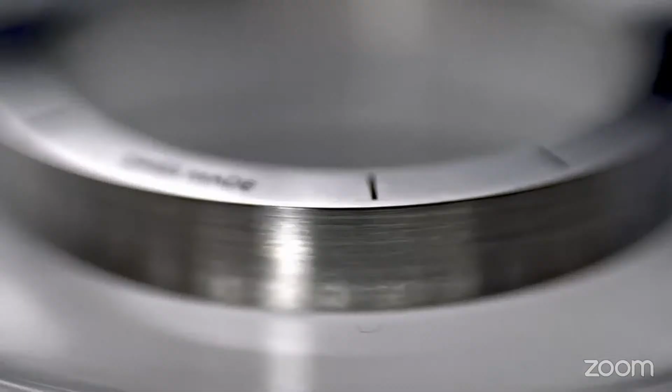Diverse sectors like automotive, jewelry, watchmaking, biotechnology, semiconductors, textiles, and consumer electronics all have one thing in common: the challenging demands of precision manufacturing are tightly coupled with the need for rigorous efficiency and scalability.

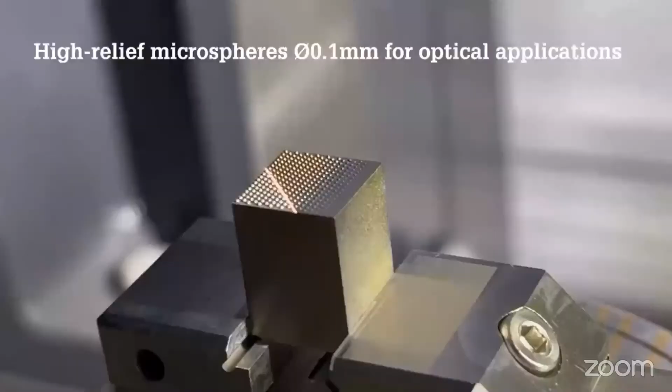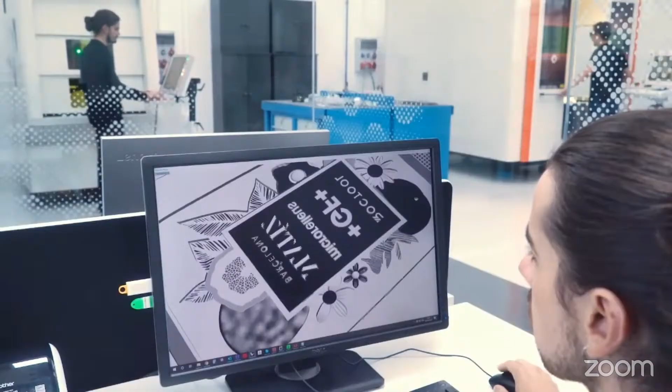But getting things right first time presents formidable obstacles. Take automotive, where laser micromachining is key in making precise components. There is huge pressure from clients to optimize production speed without compromising quality, because product recall is the nightmare scenario for car manufacturers.

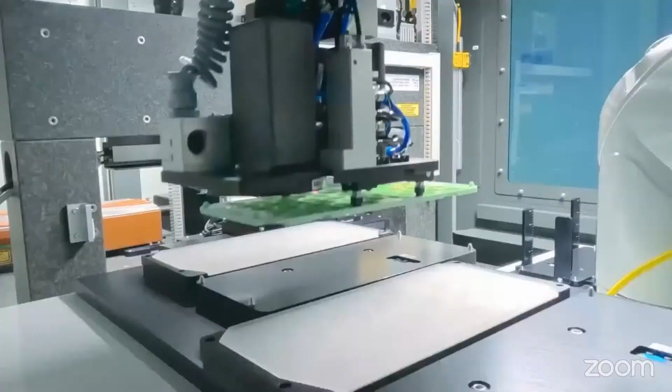Similarly, in the jewelry and watchmaking sectors, precision is synonymous with value. End users deal with the delicate balance between achieving complicated designs yet maintaining cost effectiveness.

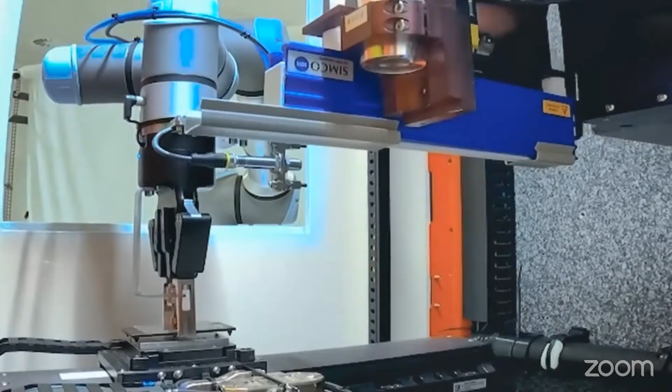And in biotechnology and semiconductor manufacturing, the quest for ever smaller components demands cutting-edge laser technologies capable of sub-micron precision, pushing the boundaries of current capabilities.

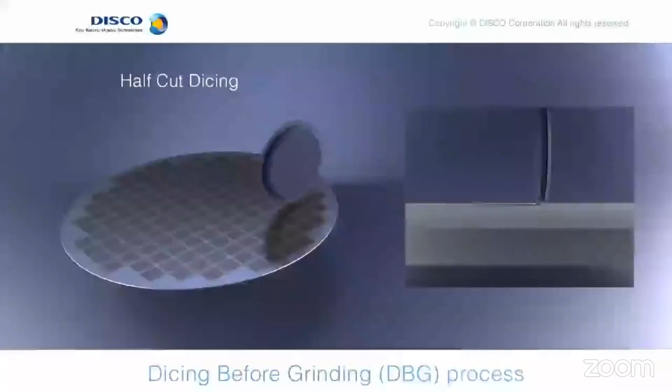In the consumer electronics sectors, where smaller and lighter is usually better, partnerships with suppliers offering precise beam shaping capabilities can accelerate sustainable product development.

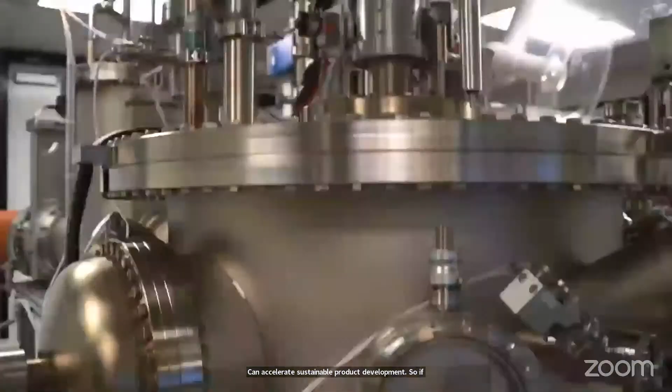So if you are a manufacturer of ultra-fast lasers, laser diodes, specialty fibers, laser optics, if you want manufacturing equipment for assembly and test of laser systems, or if you are looking for the right laser for the right application, then do not miss the chance of making meaningful connections.

Prepare your answer to the Optica question and then join us at 7 AM in Seattle, 10 AM in New York, and note the slightly earlier starting time of 3 PM.

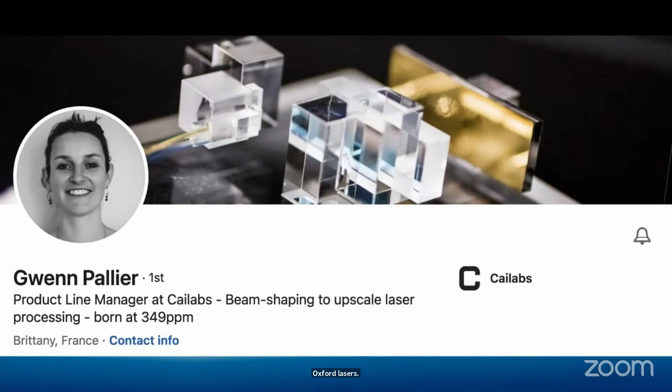Vilnius, Lithuania, Light Conversion. Since to stay ahead, you need to collaborate, the Optica question has never been more relevant. So let's start hearing answers now. Indeed, right now, let's start hearing answers.

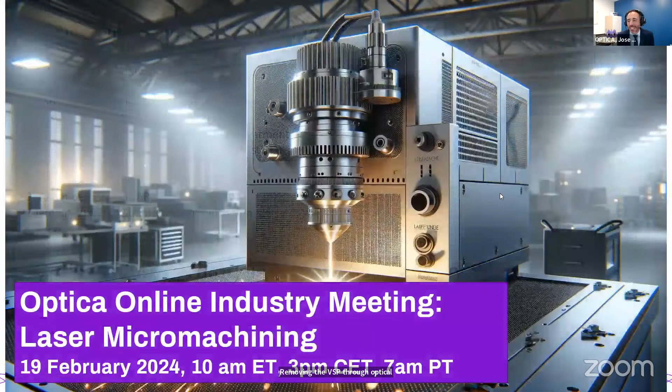As I said in the intro video, we have companies who are the integrators. They come here offering something to the rest of our members: Disco, Lasea, Coherent, Akoneer, Luxinar, and Turner Laser Systems. And the companies who come here with an enabling solution: Oxford Lasers, Amada Weld Tech, Cailabs, Direct Machining Control, 3D Micromac, Amplitude, Asphericon, and Light Conversion. And our job today is to connect them, to connect companies.

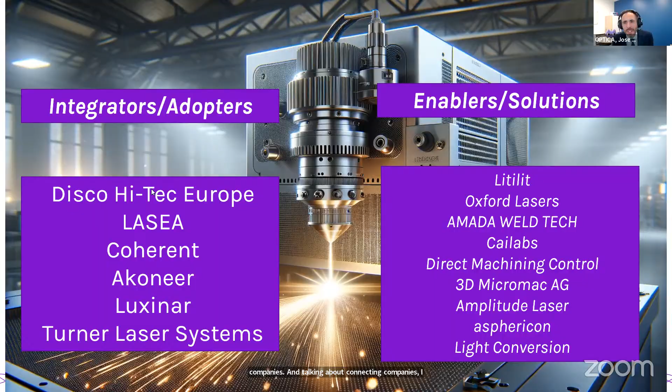We're providing them with contacts with different companies who provide coatings, different materials, optical design, software, but also with potential customers in the field of laser diodes, photonic integration, data and transceivers, cameras, tomography, everything that the companies in optics manufacturing have to do. This is the Global Advanced Manufacturing Alliance. All the companies in optics manufacturing are going to find ways to connect with potential suppliers and with potential customers.

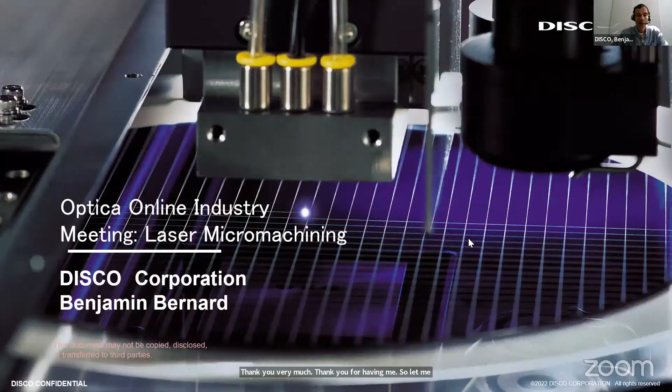Thank you very much, Jose. Thank you for having me. So let me share my slides. Can you see them? Crystal clear. Perfect. Then konnichiwa and arigato gozaimasu for having me here.

My name is Benjamin Bernard, and I'm working for the Disco Corporation. So who is Disco? We are a Japanese company. Our headquarters and R&D center is located in Tokyo, and all our production is in Japan. We have three main plants, the Kuwabata, Kure, and Chino plants. But you cannot only find us in Japan; you can find us more or less everywhere our customers are located. We have a pretty broad worldwide footprint, as you can see in Asia: Korea, Taiwan, Philippines, Singapore, and China.

In Europe, where I'm located, the head office is in Munich, and of course in the US on the West Coast as well as on the East Coast. Overall, we have roughly 6,000 employees, and we have already successfully sold quite a few units to customers. So what are our key technologies? We call them KKM. KKM stands for Kiru, Kezuru, Migaku, which means dicing, grinding, and polishing.

In the wafer manufacturing process we address mainly the back-end processes. So the grinding of the wafer until you reach the final thickness, and then some polishing to have the desired surface condition, followed by wafer singulation and also package singulation. We have grinder, polisher, and blade dicer in our portfolio, but I want to concentrate on our laser applications.

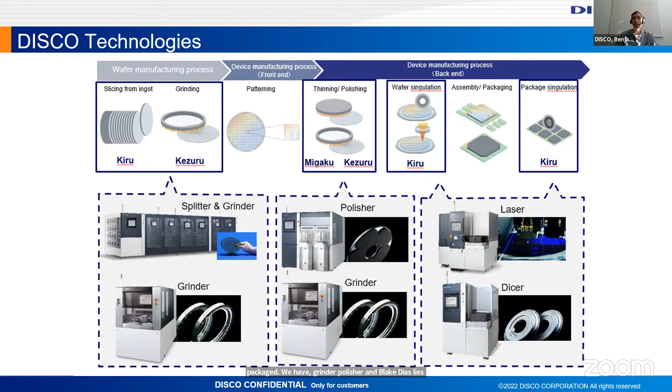For the laser applications, we have quite many different approaches. On the left side, you can see the ablative laser approaches, mainly laser grooving and laser full cut. I will have a slide on it later. In the center, you see the non-ablative approaches. Here we highlight stealth dicing, where we teamed up with Hamamatsu-san. The idea here is to focus inside the material, do a modification, do many of these modifications along your separation line, and then later on by applying an external stress, you can separate the wafer.

We also have KABRA, which addresses the wide bandgap wafer production. I will have a dedicated slide on that at the end, so I will come back to that later. Last but not least on that slide, we have the laser lift-off, mainly gallium nitride grown on a sapphire substrate, and then you want to lift off the GaN. So we use a laser to focus precisely on the interface between those two materials, and then you can lift off the gallium nitride layer from your bulk material and transport it wherever you want to have it.

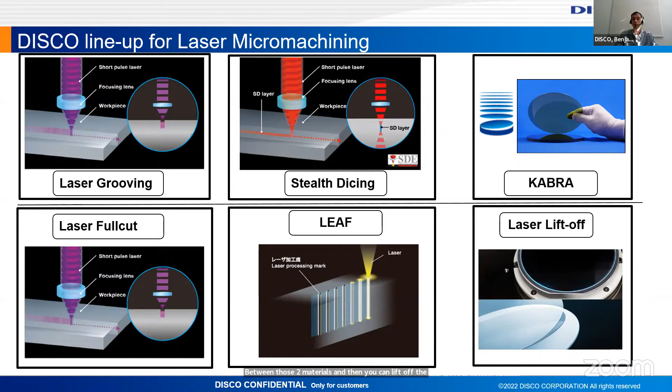So focusing on the laser ablation, what kind of process strategies are we offering? The main application in the semiconductor industry for the laser is still laser grooving, followed by blade dicing. The laser is used to remove some sensitive top layers or PCM structures like metal structures, gallium nitride that is hard to dice with the blade. You open the dicing street for the blade cut, and then cut the bulk material by the classical blade dicing approach.

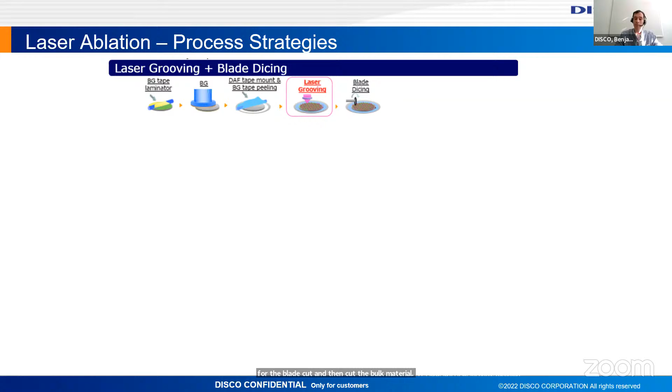Very similar, but a little bit changed in the sequence, is the dicing before grinding approach. Here you do the laser grooving and the blade half cut still in thick wafer condition, and then you grind it back, and by tape expansion, you can release the chips into the individual dies. The third one is the laser full cut. The idea is obvious. You completely cut the wafer with the laser. You focus on your top side and remove material until you finally cut through.

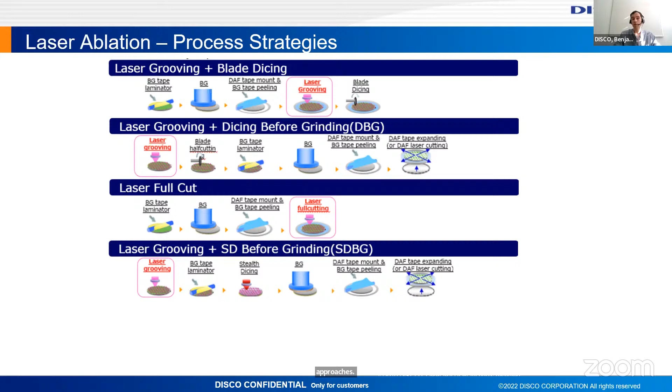Another approach, you see there are quite a lot of synergies between laser grooving and different approaches, is stealth dicing before grinding. You do the stealth dicing modification from the backside. But if you have on the pattern side some metals that are hard to expand, then you need to remove them also with the laser. And last but not least, we teamed up with an American company called Plasma-Therm, who is providing plasma dicing equipment.

So shout outs to my colleagues from Florida.

And here the idea is that with the laser, we can remove, again, metals that cannot be plasma diced, or also open the resist. You can also use our spin coating as a resist for the plasma dicing, and then the laser grooving opens the resist at the positions where you want to interact with your plasma.

One example I want to show you for a classical grooving process is here: gallium nitride, a wide bandgap material. For the grooving process itself, it's key to not create a significant thermal damage zone on your bulk material, because after the blade cut, this will reduce the mechanical robustness of the die to survive the subsequent process steps. But as you can see here, if the conditions are correctly chosen, you get very clear and defined cutting edges, a very smooth surface roughness, defined grooving depths, and also for wafer-to-wafer bonding applications, it's important to have very little recast or burr, because this transfers into a larger area that is not bonded on your device.

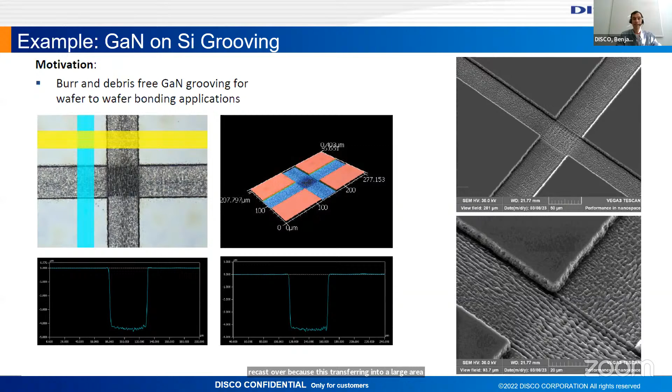The last slide that I have is focusing on silicon carbide wafer production. Due to electrification and the need for many inverters, the wide bandgap materials gained a lot of attention lately. The classical approach is you grow the silicon carbide in a chamber. So you have a certain boule, and then you cut the silicon carbide wafers from this ingot with a wire. We thought we have a better solution using a laser to focus inside that ingot, creating the so-called KABRA layer. And then by some subsequent process steps, you can get your wafer split from the ingot.

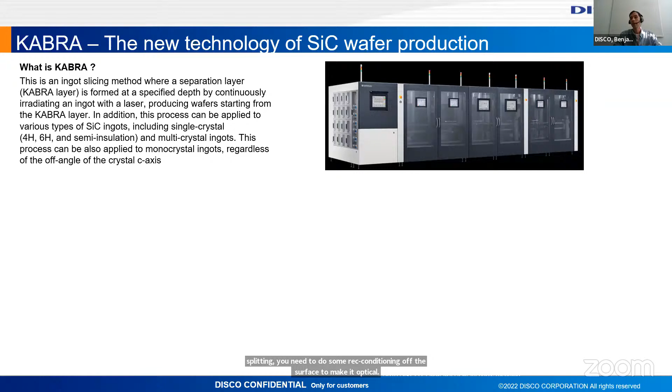On the image here, you can see our fully automated tool. More or less, you can store several boules, several cassettes for the wafers. Of course, after one wafer splitting, you need to do some preconditioning of the surface to make it optically in good condition again. But this tool can do it all in one line.

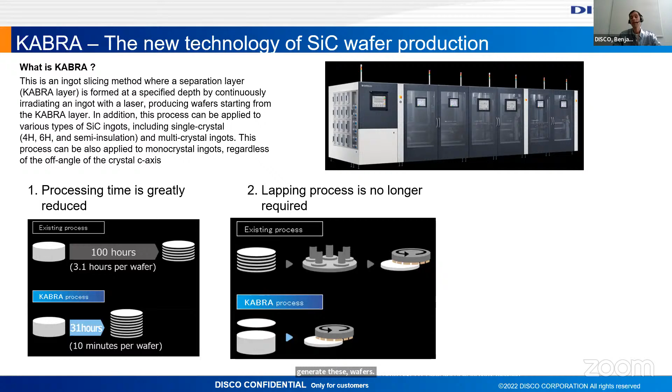And compared to the classical wire saw, we could reduce significantly the process time to generate these wafers. Also, due to the precise and gentle interaction of the laser, we could skip some process steps, so you don't need to do so much preconditioning after the splitting.

And finally, which really is directly money in the pocket of our customers, we can reduce the kerf loss. That means the material that is wasted when you cut silicon carbide from the ingot. So that is our approach for the silicon carbide wafer production, and we call that KABRA.

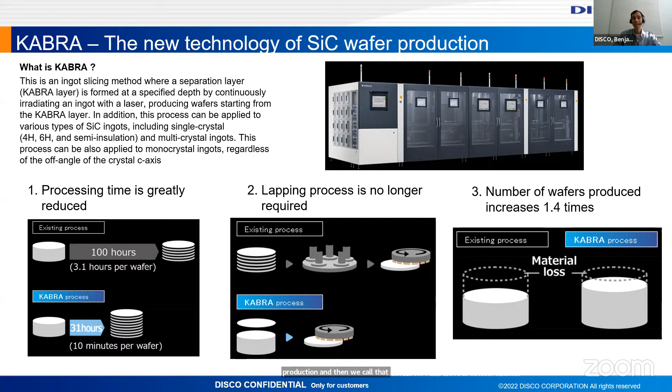Yeah, since I just had 6 minutes, more or less, I'm almost through. So as you can see, we try to work really on the cutting edge. We have good relations with all our customers, and we are able to integrate the newest technologies into the semiconductor device manufacturing market. So please keep in mind, Kiru, Kezuru, Migaku, Disco.

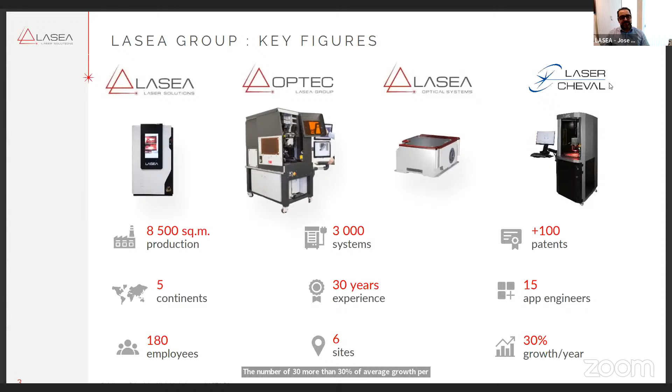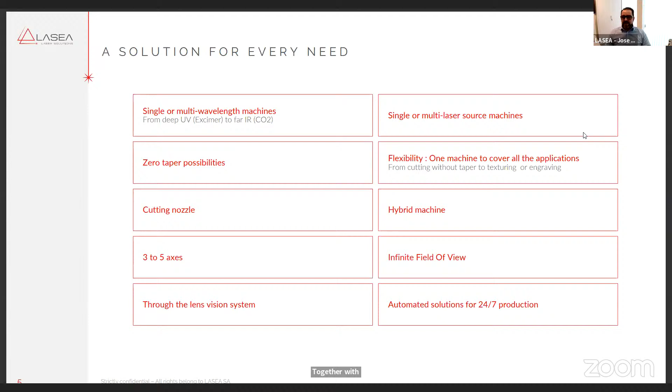So we like to say that we provide a solution, not just a laser machine. We provide a solution that is based, of course, on our expertise, that is very broadly developed around the use of femtosecond lasers. But again, as we say, we provide a solution. That means that sometimes we integrate other types of solutions, other types of lasers, depending on the application, together with other characteristics, and always around providing a very, very accurate laser system, laser solution.

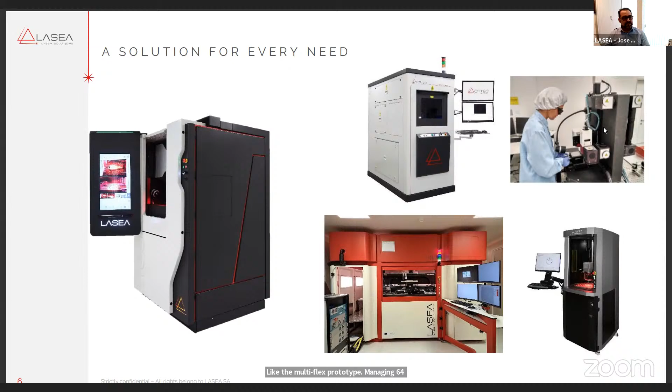What do our laser solutions, our machines, look like? These are just a selection of a few of them. For example, on the left, the most recent concept of machine developed for high accuracy and high productivity applications. But we have other solutions, for example for research, or developed in the frame of research activities, like the MultiFlex prototype managing 64 beamlets in the same system that is installed in Aachen at the Fraunhofer ILT as a result of an R&D project.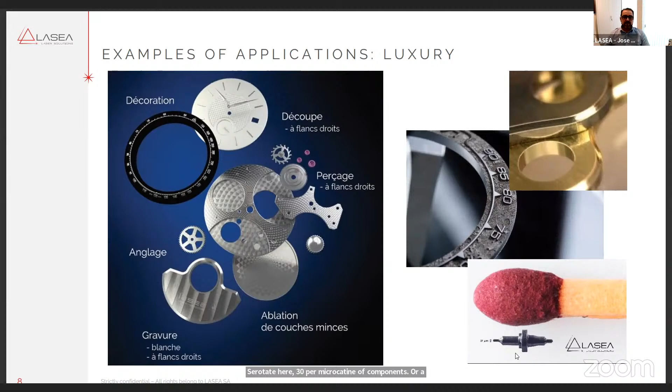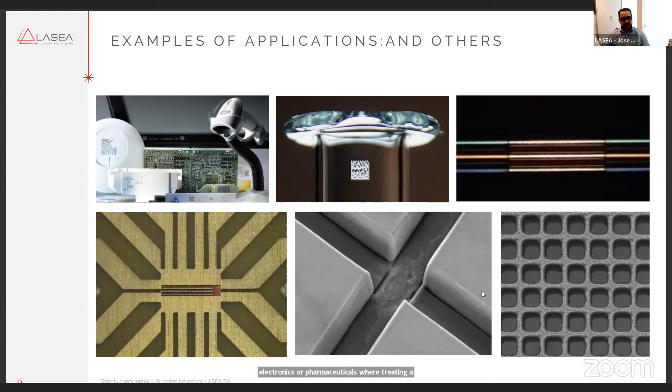Examples of applications we find many, for example in the medical field, and here are a few of them. They are mainly used for implant manufacturing or other devices, for example intraocular lenses, cochlear implants or catheters. But we also find many applications in precision micromechanics, in particular for high-end watchmaking, as we can see here, for example taper-free microcutting of components, very complex 3D engraving, or turning very accurate parts, down in the picture, amongst many others. For example, traceability for electronics or pharmaceutics, wire stripping, conductive layer removal, or ceramics processing. Also for electronics, on the right down.

To conclude, we provide efficient and reliable high-precision laser solutions for micromanufacturing. Our solutions replace more polluting production methods, so we help in achieving more sustainable production. We also help in developing solutions in the area of miniaturization or functionalization of surfaces, allowing the design of new, more efficient or improved products. We do this using cutting-edge technology and with a collaborative and innovative spirit. All this helps us provide laser solutions that help progress the field of microtechnology.

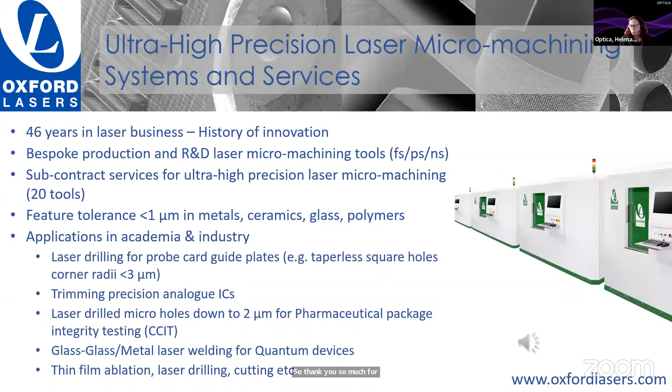Daniel, can you please open your mic and say your question yourself? Sure. Yeah, I've seen in the presentation... Hello, everyone. I've seen that you have a 1 kilowatt average power femtosecond laser. What is that used for?

Hello? Yeah, okay. Could you please repeat your question? I caught just half of it. Is it about integrating 1 kilowatt femtosecond? Yeah, sure. I've seen in your Lasea presentation that you can build, or have an option of, kilowatt average power femtosecond lasers.

Probably you have seen it in the slide about research and development activities, where we have the experience of integrating those power levels in femtosecond lasers in the frame of some research projects. As far as I know, and maybe I'm not updated, there are no commercial 1 kilowatt femtosecond lasers available at this time, at least industrial grade, but maybe we can clarify this point today. We've been involved in several projects dealing with 1 kilowatt and above ultra short pulse laser levels.

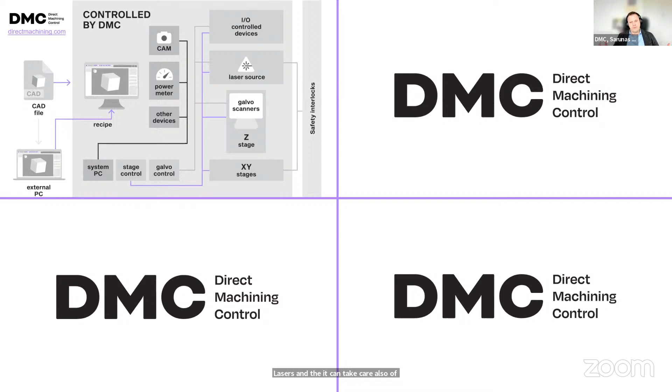Okay, so I will start by just telling what is DMC. DMC is a software for laser processing system control. It takes in a CAD or geometries and allows you to define the process logic, and then it controls all the different devices that you can see to do an application. DMC is also hardware independent, works with a wide range of control systems, various devices like cameras, sensors, lasers, and it can take care also of the complete machine control, or sometimes just some integrated subsystem.

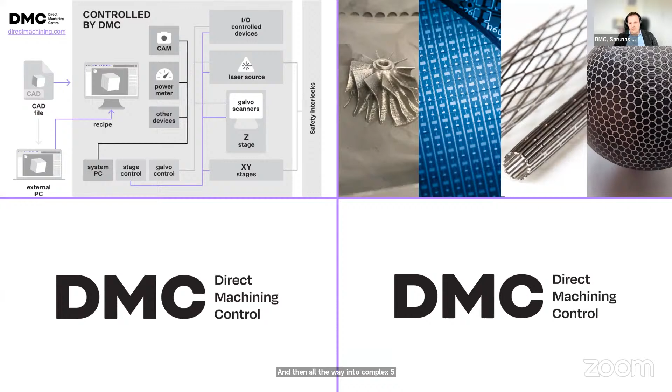The applications we support are also very wide ranging, from additive manufacturing to various laser micromachining cases in semicon, medical, electronics, and then all the way into complex 5-axis system control, freeform surface processing, sometimes involving robots.

In terms of capability, DMC can easily handle simple applications, but then it has a lot of advanced capabilities. Going from left, like freeform shape processing, kinematics, working with 3D CADs, the integration of sensors, scanning the surfaces, adapting processes based on that, camera integrations with machine vision. DMC has its own vision algorithms, and then complex control where we can control multiple systems simultaneously, load balancing, special strategies, or cases where we need to process millions of objects or rows to satisfy some throughput requirements.

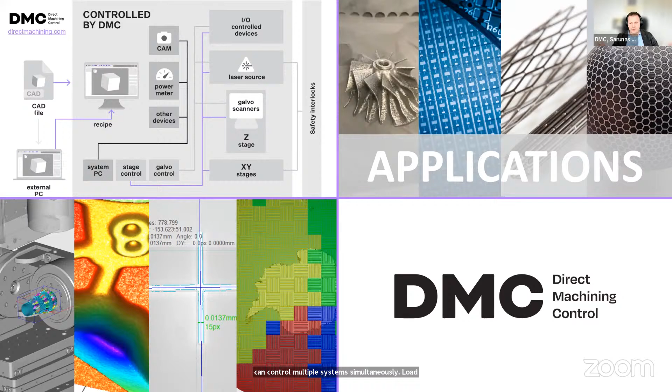And then the last question, how can you use DMC? There are 3 ways to do that.

And you can start with a standard interface, which is very flexible and perfect for application development. Then you can integrate that into your own application, or we can develop a custom HMI for you. So basically, DMC can take care of the whole way from application development all the way to the fully integrated industrial solution. And that's my quick intro.

Thank you so much, Sarunas. So this is very good because we have a lot of lasers here. So coming back a little to Brennan - Brennan, what exactly do you need from the laser manufacturing?

Well, most of our applications today require femtosecond lasers. It was discussed before, but we do focus on very clean, very short pulses. Some applications are so sensitive that the difference between a 250 femtosecond pulse and a 500 femtosecond pulse is actually notable. And from the controls side, we're finding more and more that we really need advanced control systems, not just for motion, but also for coordinating the motion systems with the advanced galvanometers and multi-axis scan systems. So really the full range of integration equipment is essential to making sure our systems work properly.

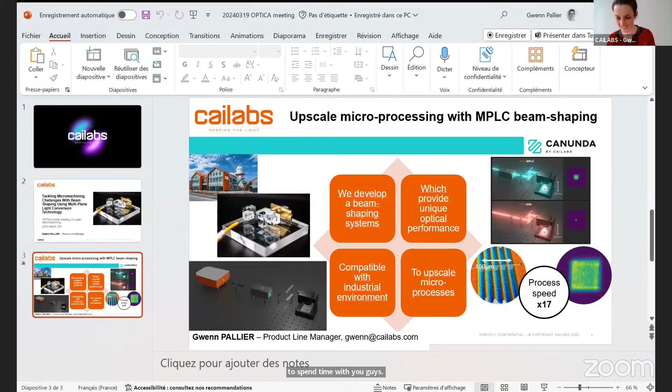Hi, Helena, can you hear me well? Very well, perfect, great. Give me a second to share my screen. It's really cool to be here. Hi also, Jose, always nice to spend time with you guys. Impressive actually, the number of people who joined. Okay, your sound is a little distorted now. Sorry, can you hear me now? Better now. Okay cool, is it full screen?

Yes, okay perfect, great. So Cailabs in short - you can recognize Helena, the building on the top left, this is where we are. We are actually a French company developing beam shaping systems. What we developed since the beginning of the company 10 years ago is called MPLC, for multiplane light conversion. This is what you can see on the left, an example for telecommunication.

The idea is to provide something quite unique. I'll keep it short - this is not a DOE, this is not freeform optics, this is not beam shaping in the laser, this is multiplane light conversion. And it provides different performance, optically speaking. You can see, for example, on the top right, an image when defocusing with a system of ours versus something based on diffraction - the beam behaves very differently due to the technology behind the beam shaping.

So the idea is that because you have different performances, it can also enable different things. And the idea is also to develop solutions which are available and compatible for the industry, and the constraints of being inside the industry. I'm pretty happy that I can come after the Lasea talk, because in my opinion, kilowatt lasers is actually the future, but it needs proper beam shaping - one beam with so much energy, because generally it goes with high energy not only high power, is actually pointless. I guess everybody agrees on that. And the idea is to shape it properly.

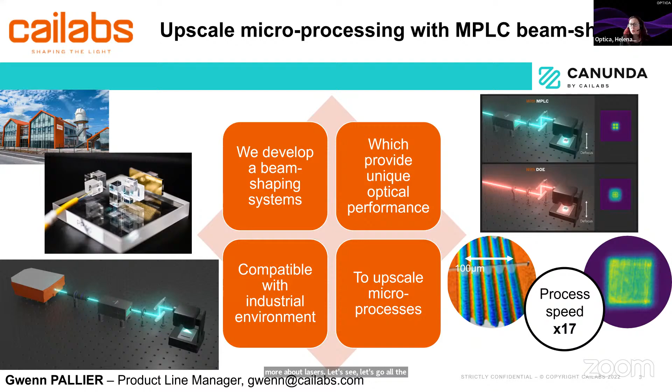But now talking more about lasers, let's go all the way to Germany. In that case, although they are everywhere, this is a company that has all kinds of colors and energies and shapes for lasers. This is Coherent, and the product line manager, Fabian Sores. Fabian, could you please take the floor?

Yes, thank you very much. Thanks for the kind introduction, and thanks for the opportunity to talk today. So let me share my screen. You should see the slides now.

Yes. Okay. So I will not be able to present all of what Coherent is doing and providing to the industry in 6 minutes. So I will focus on a more detailed topic, which is actually a cooperation, a partnership that Coherent has with the ILT Fraunhofer in Aachen, called the UV Center of Excellence. And I titled the talk UV lasers from excimer to ultrafast lasers, because that's what this center is focusing on. And before that, please allow me as a product manager to talk a little bit about products.

So Coherent has been a DUV or UV company for many years. We have been developing all sorts of laser sources, from CW and QCW systems to ultrashort pulse lasers, and of course, high energy, really extreme high energy systems in the UV and the DUV that have been in the industry for decades now and have been sold in very high volumes to the market.

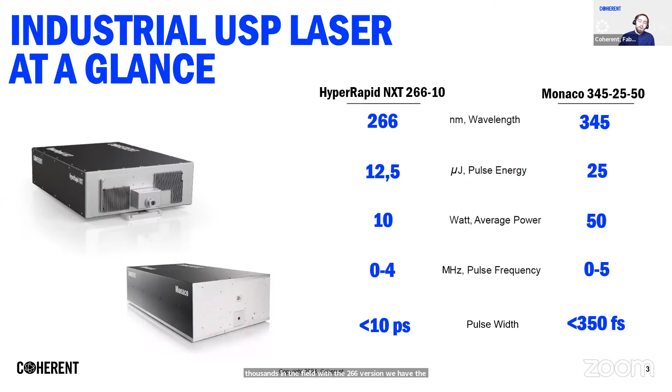Focusing on two products, and specifically the solid state design for lasers. We have the HyperRapid NXT product line with several thousands in the field with the 266 version. We have the Monaco femtosecond laser with a UV version. And of course, I would say today the pinnacle of solid state lasers being the Python with up to 2 joule single pulse energy or up to 4 joule with the twin Python.

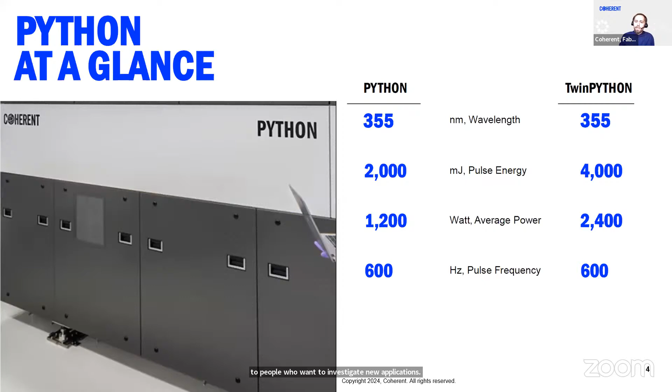So these are the sources that Coherent can provide, and we have a strong expertise in designing these laser systems. However, what was really needed to help the industry move along is a center or a place where these lasers can be made accessible to customers, to people who want to investigate new applications. So 6 years ago, Coherent started a cooperation with the ILT Fraunhofer, first for excimer lasers, and 2 years ago, we expanded this cooperation to include ultrashort pulse lasers as well.

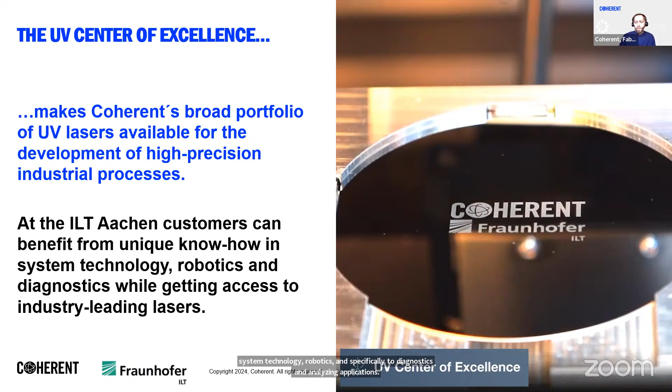The idea here is that the expertise of Coherent designing these lasers and making them available to the ILT Fraunhofer in Aachen would be combined with the capability and knowledge of the ILT when it comes to system technology, robotics, and specifically diagnostics and analyzing applications. So today, the ILT Fraunhofer and UV Center of Excellence on site have multiple laser systems, not just standing around, but actually in tools available to researchers, available to customer requests to investigate cutting-edge applications, but mainly investigating the next generation of laser micromachining applications.

And this by comparing UV with deep UV, comparing femtosecond with picosecond, or directly comparing ultrashort pulse lasers with excimer applications. And this is something that is not easy to do elsewhere in the world. There are only a few places where you can really do this with the same samples on the same ground, under the same conditions, making one-to-one comparisons.

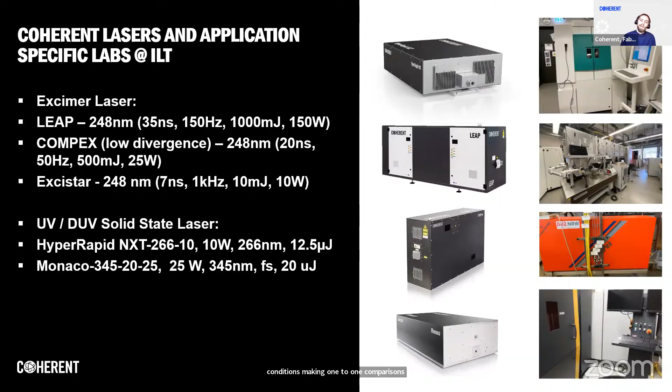And a few examples of application results are shown here, where, for example, Benjamin from Disco talked about it. They're doing this as well. This is a real application in the industry already today, laser liftoff of gallium nitride for transistors. And to a degree, it's an excimer process, but you can do this with ultrashort pulses as well and potentially achieve better quality, but getting a real direct one-to-one comparison of throughput, speed, and quality is not easy to achieve. And the UV Center of Excellence can do this today and can get to really good results and see what benefits there are for different technologies.

They're investigating polymer structuring with 2D phase masks, creating really, really small structures, in this case, 350 nanometer structures on a 950 nanometer period with 1 million structures per second. And they're doing this both investigating these technologies with excimer and with deep UV USP lasers to identify what benefits each technology has.

And it's rather interesting because it's not only driven by a clear customer demand or a clear business case, it's also driven by the question, what is possible today? What are the edges of what we can achieve with this technology that we have? What might be interesting to follow up on? And that's a resource that is really valuable. And having the time and resources to ask these questions and get answers to them has been really valuable.

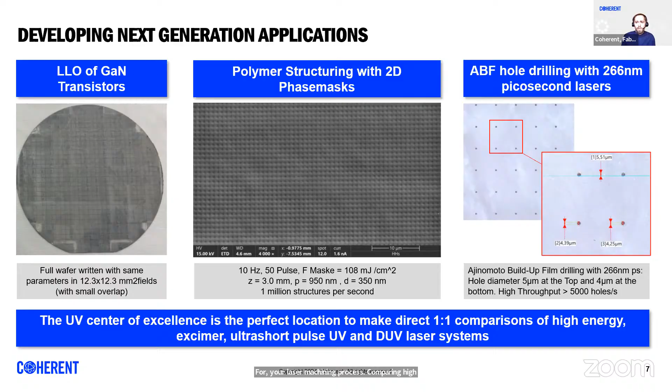So to close out, the cooperation between Coherent and the Fraunhofer ILT is dedicated to developing the laser processes for the industries of tomorrow. And we'd be very excited to have you join us and work with us at the UV Center of Excellence.

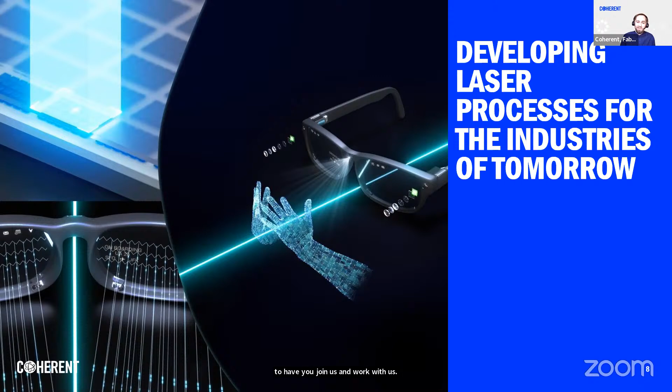Thank you. For anyone who has been to Aachen, next time you go there, visit Fraunhofer ILT and visit the laboratories. It's simply fascinating. Fabian, representing Coherent, one of our key star corporate members. What can we do for you? What can you do for us?

Well, in the context also of the UV Center of Excellence, I think what we can provide is cutting edge laser technology with industry-proven laser designs. And with the UV Center of Excellence, we can provide a location where ideas can be tested, where new process ideas, new applications can be investigated on a very high level very early on. So I think that's something that we can provide today, and we'd be very interested to work with customers.

And I think we cannot have a meeting on laser micromachining without having one of the industry leaders on laser micromachining in the room, a person who most likely is going to want to talk to you about some R&D cooperation and that lab. Uwe Wagner from 3D Micromac. Thank you very much for being with us today. Uwe, are you with us? Yes, he is. Yes.

Thank you. So what is 3D Micromac? We are setting worldwide standards with our laser machine solutions for a wide range of different applications in the field of laser microprocessing. We typically develop with a huge group of engineers innovative processes with and for our customers. And typically, we substitute established processes with a completely new approach, or even enable entirely new products with a certain laser application for our customers.

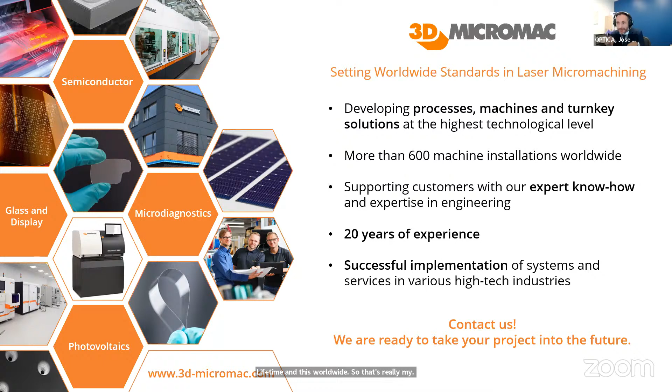Okay, so I'm curious to know, for a given laser source, which optical module is best suitable for what thickness? Has anyone done any comparative study? Especially comparing Holo or diffractive optical elements with Cailabs' MPLC beam shaping solutions. We may be comparing apples and oranges, but I want to get the feeling of the integrator, the end user.

Thank you very much, Dr. Reddy, for posting this question. This is all open for opinions. What happens in the next 20 minutes stays in the room. Let's open the room for discussion. Nathan, tell me, what's on your mind? Hello, Jose. Nice to see you. It's been quite a while since I participated in these meetings.

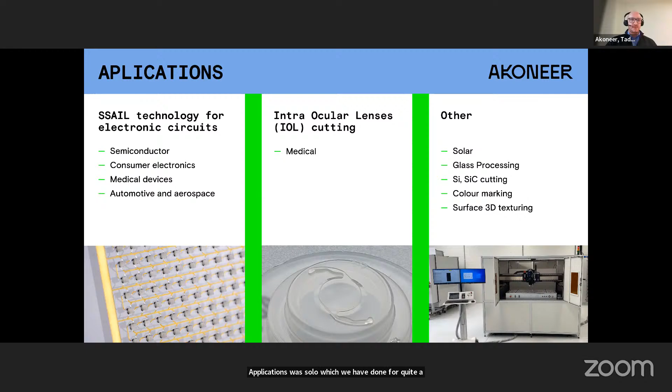Specifically, now we focus a lot on SSAIL technology. I'll talk more about it, but basically, we can selectively plate copper on any material. Also, one of the interesting areas we are looking at is intraocular lenses, which Lasea also mentioned for medical applications. And then more traditional applications with solar, which we have done for quite a long time, and glass, semiconductor materials, color marking, etc.

Now, what we see in the laser micromachining market is that a lot of the applications are becoming more and more mature, and it's more of the same, I would dare to say, where we are doing the same processes, but faster, cheaper, and not necessarily new.

And the new applications that are coming are not necessarily something new being done, but becoming commercially viable, because we can do that at a larger scale, cheaper, or a little bit better, because of the growing laser power. In the last 10 years, probably for the same amount, 10 years ago you could buy a 4-watt femtosecond laser. Now it's 40-watt. We have the beam splitting. We have beam shaping for using all those high powers.

Maybe just the burst, which we see as a potential innovation in the laser sources, which could bring really something a little bit new. Though a lot of the appeal is also in just making current processes and current applications more efficient. So my question is, where are the new frontiers? Where are the really new applications? And I think that becomes more and more that interdisciplinary area where it's laser plus something, and then we can find some interesting combinations.

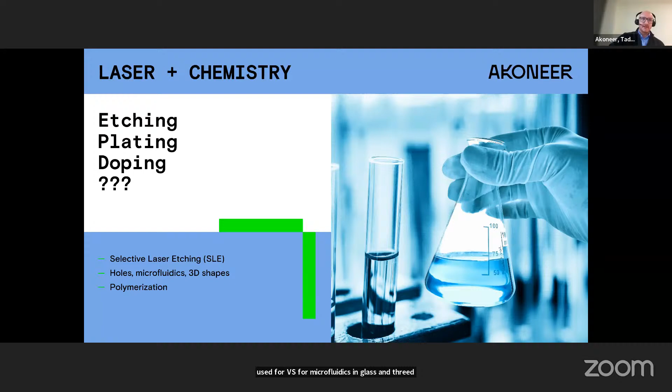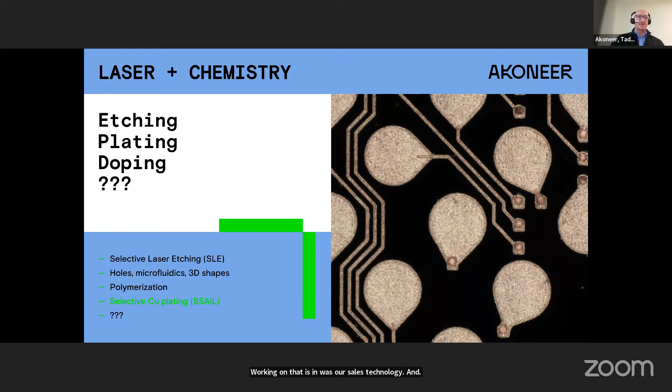And of course, the widest area for that at the moment probably is laser plus chemistry. We have selective laser etching, where it's now used for vias, for microfluidics in glass and 3D shapes. We have polymerization for some nano printing applications. Where we are working on that is with our SSAIL technology, where we selectively plate copper with the help of laser. And probably there are some other applications, and it would be interesting to see some new developments in those

interdisciplinary areas. With our SSAIL technology, we structure the surface with a laser, and then when it goes into the chemical process, copper sticks only where we did the laser processing, and we can do that on pretty much any dielectric material. So on standard electronic materials currently used for PCB, or on other materials coming into the electronics market, like glass or ceramics, a lot of different polymers now used in semiconductor packaging. And that's how the process looks. So as I said, really a mix of laser process and chemical process.

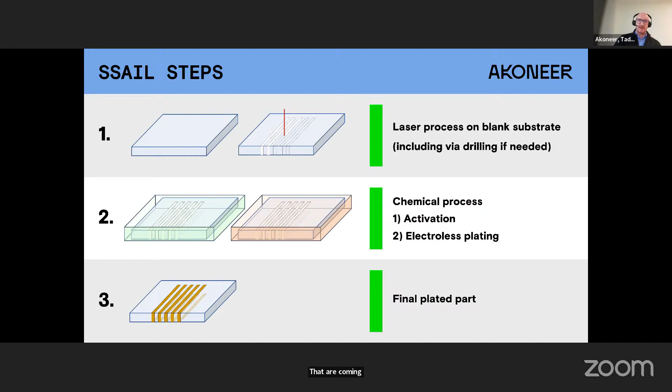And what can be done. We see that area as one of very high potential, and potentially a big breakthrough in electronics manufacturing and also in semiconductor packaging. And I'm pretty sure that in that area between laser micromachining in combination with something else, there must be some other applications as well that are not yet found out. So I see that as a very interesting area to work in and to look for new applications. So that's my short point that I wanted to bring to the meeting.

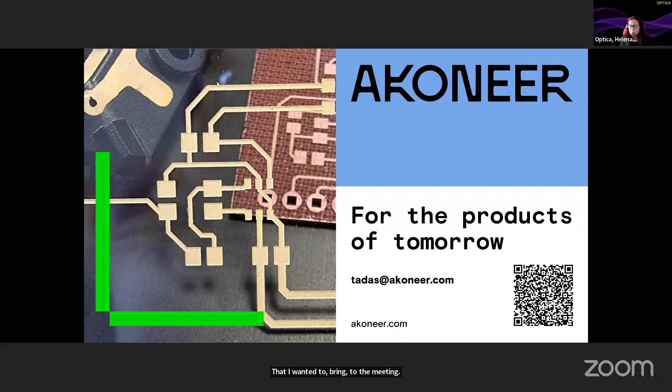Thank you so much, Tadas. That's actually a very good question, like we heard before: where is laser micromachining going? What is going to be the future? What is going to come? What are going to be the new advances, the new technologies, or the new applications? So my question to you is, what do you need from the people here on the floor to move forward in laser micromachining? What are you looking for for new applications?

Well, obviously, the laser source is always a big component. I think we are quite well covered with the local manufacturers as well. But also all the beam shaping and faster scanning solutions where the throughput could be increased. That's a very interesting area. Another interesting area is beam monitoring, for what's really happening on the sample when we are fabricating, so we can make closed loop fabrication and really control the process and make sure that it's correct the first time.

So we have here in the room Marcus from AKS. Marcus, do you have something to say about how to do the monitoring of the beam? Marcus, are you available?

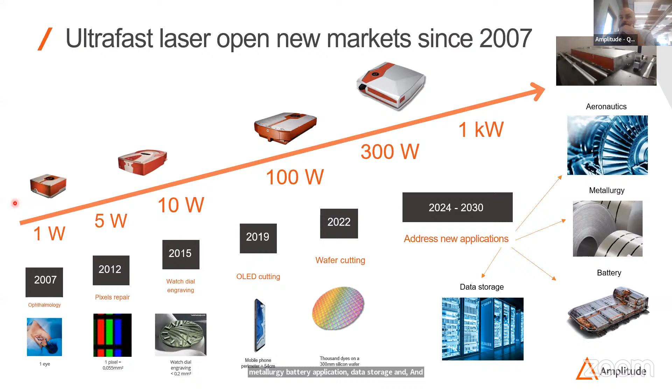Thank you so much. So as we see, this is kind of the conversation: everything that's going to miniaturization is going to need laser micromachining, and then we're going to have different materials or traditional materials. This is the kind of conversation I would like to know where everyone in the room is thinking.

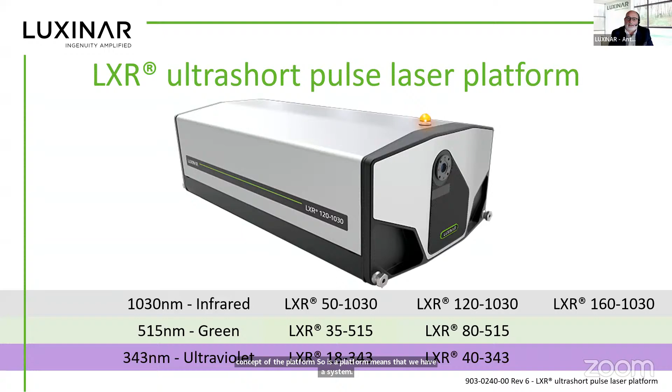And what we developed for ultra short pulse laser is the concept of the platform. A platform means that we have a system that we can decline in different laser power levels and also different wavelengths.

It's important to note that some of the features that have been asked before by Ben and also by other speakers, like pulse on demand, external gating, full control of burst and fast burst mode, as well as an interface available to drive the system, are already in the platform and available for any type of laser. Clearly, there are also important laser features like beam quality and power stability.

But this is also important when we speak to end users or people who would like to use laser. It's important that we start to speak their language. So if we are laser specialists, we have to provide solutions with several choices on power level and wavelengths. Also, we have to make their life easy.

They should not be worried about the laser. So it's very important to have very stable and consistent beam quality, so the end user should not be concerned to check what the laser is doing. The laser is running - you take a car, and what does a car do? Just bring you around. You don't have to take care too much about the details of the car.

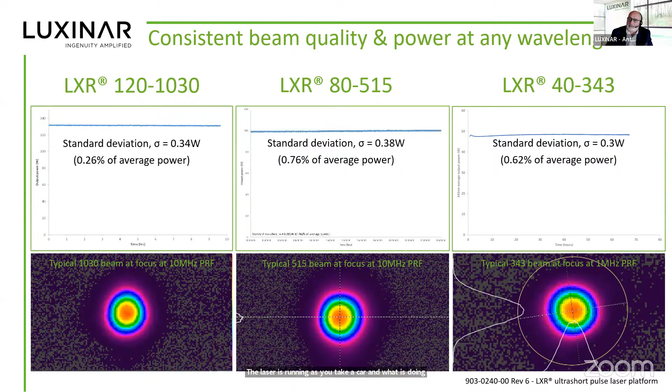Clearly, as with a car, you step in and warm it up 5-10 minutes. In the case of the laser, we're speaking about 15-20 minutes, and then the laser is repeatable - after 2 minutes as well as after 60 minutes or the day after. When you switch off the experiment or production, the day after you start from the same point. This is probably something that is underestimated.

Power - most people speak of power, but it's very important to control the power of the laser. Not because it's the power itself, but how you deliver the power into the working piece, the piece you have to machine. So the control is very important, and also how you control it with the machine.

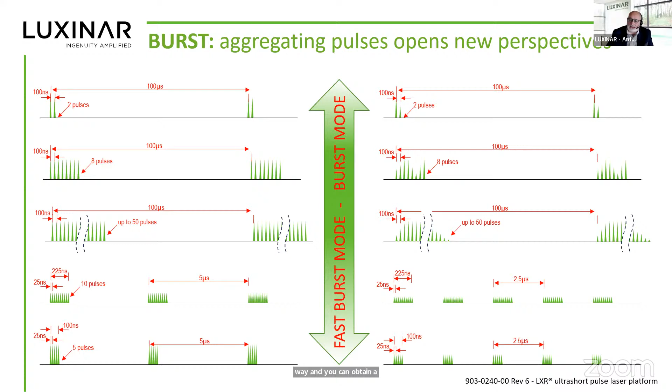A key feature is how you deliver the pulses in time. You can aggregate pulses in a burst, and you can also edit the single pulse in the burst in different ways, obtaining very different ways to put energy into the part - and these are driving the quality of the resulting material, of the resulting processed parts.

As I said before, it's important to make it easy to work with the laser. Honestly, I've been in love with lasers for 35 years, but the laser is nothing else than a tool. So we must really put it at the lowest level and make it easy to work with. The LXR platform has 2 levels: a standard user level with very easy to manage features and functions, and an advanced user level for people from maintenance as well as R&D or process engineers, who can work more at this level.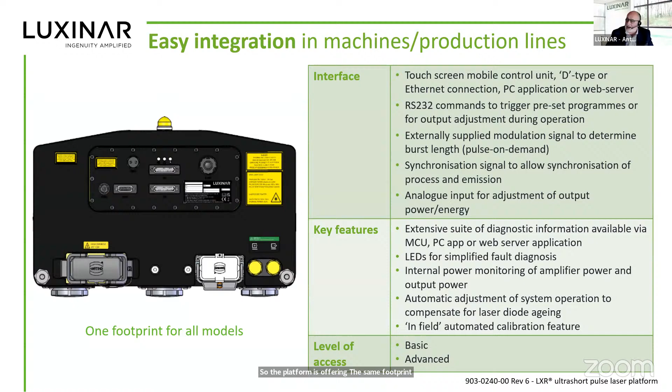Laser is a tool that normally is integrated into a machine, so it's very important to think of easy integration. The interface probably is redundant. You can drive the laser in multiple ways, and the key point is how you synchronize and control the laser from the machine. Also, it's very important the footprint. It should be very easy to put the laser into a machine, and also to have the choice to select a different type or model of laser without redesigning the machine. So the platform offers the same footprint for every type of model and every level of energy. Here we've spoken already about application.

The potential of a laser, and especially of an ultrafast laser, is limitless. It's not the matter here to discuss in detail. So just briefly, let us know your needs, let's talk together, and we will provide a solution to solve the problem of the customer.

Thank you so much, Antonio. Luxinar has proven to do laser micromachining very well, all these applications with high precision and basically no waste, which is also another part of it. One of the questions we have is actually from Ila from Fluence.

Ila, can you open your mic and ask yourself? Yeah, hi guys, we focus on burst modes, and I'm curious what's the intra-burst interval in Luxinar femtosecond lasers, because it can be beneficial in some industries to avoid plasma shielding if you can control the intra-burst interval.

Yeah, so the intra-burst distance is 25 nanoseconds, 40 megahertz at the key seeder, and the inter-burst minimum separation is 200 kilohertz.

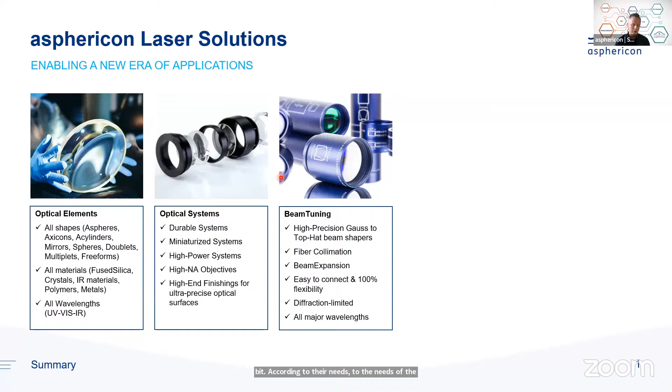And as a consequence, more than 10 years ago, we derived some standardized products in terms of beam shaping and beam expansion, where we basically have a smart toolbox where you can combine any kind of beam expanders and beam shapers, put them together, play around, and tweak them a little bit according to the needs of the customers. They all work diffraction limited in all the major wavelengths, starting from 355 up to 1064.

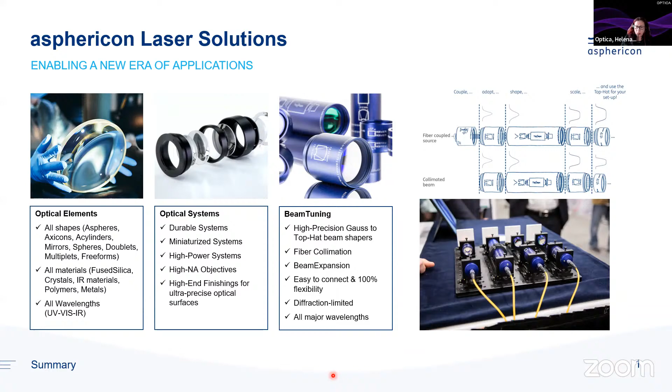Well, hello. What's really important in laser processing, especially when you go into really small features, is the kerf loss, and this is all about spot size, I believe. So how can we basically optimize that? The quality of the optics, for example, is really important. The wavelength of the lasers is really important, and so on. So this is basically the question: how can we reduce kerf loss in general?

Benjamin. So you're referring to the kerf loss for the Kabra process of the silicon carbide splitting? Yes, indeed. This I would rather discuss in person. So please contact me. Very interested.

Thank you. Lars, it's the first time you come to this group of people. Please say hello and tell us what you do. What is PSSP? Well, I set up PSSP a few years ago as a photonic supply and services partner. It's all in the name. I want to accelerate the adoption of photonics in industry and academics, and to boost the problem-solving capabilities and innovation potential that our very valued technology has. And this I do with OEMs, universities and startups. So I'm really excited about photonics, its capabilities, and pushing the boundaries.

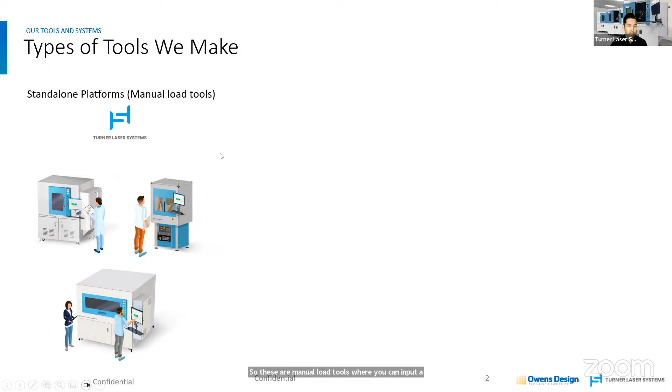So, very briefly, the types of tools we make: standalone laser micromachining tools. These are manual load tools where you can input a wafer or a sheet of material. We work with medical devices and a variety of different materials for micromachining. We also build fully automated systems. These standalone tools are often partnered with things like an equipment front-end module if you're working with wafers or solar cells.

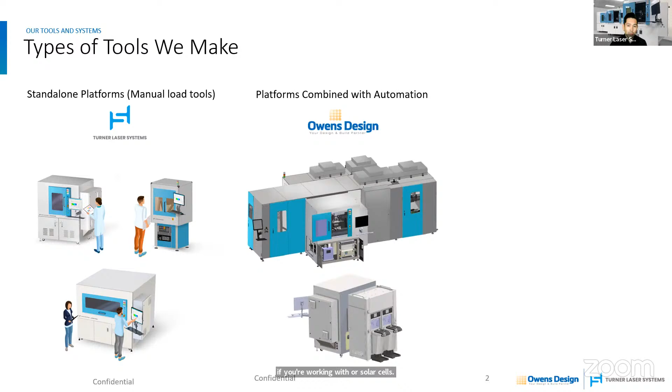We also build fully custom automated robotic solutions as well to be used with these laser micromachining systems. And then we can also build fully 100% customized laser micromachining solutions for a variety of applications. It really depends on the application of what type of equipment would be best to support it.

So, one of the wonderful things that we see here in the micromachining space is that it gets to serve a variety of different industries. Based here in the Bay Area of California, we see a lot of work with medical devices, particularly medical implants, semiconductor applications. Battery is a very hot area right now where we're seeing a lot of new materials, a lot of very challenging materials to process, and micromachining has a huge role to play in the battery and energy industry as well.

For solar manufacturing, particularly scribing and dicing of solar cells, we're seeing a lot of micromachining applications there. And of course, consumer electronics, display, VR, AR, they all have manufacturing challenges that leverage micromachining today. So, the types of lasers, optics, processes we work with, kind of listed a long list of applications here.

I'd say at Turner Laser Systems, we primarily work with femtosecond lasers and picosecond lasers, so it's great to see a lot of conversation here today on those. But we still do a lot of work with nanosecond, fiber CW, and CO2, often as a complementary laser source to the ultrafast lasers. And the types of processes we'll do include ablation, cutting, dicing, drilling, etching, micromachining, welding as well, to just name a few of the core processes that we'll work with, and across a variety of different form factors.

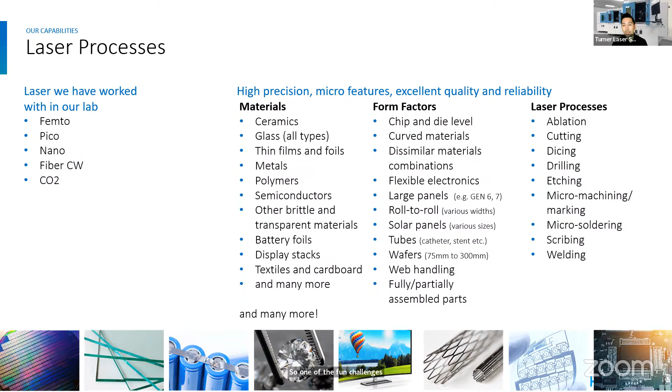So one of the fun challenges we have in the automation space is working out how do we not only use the lasers, but how do we bring the materials and handle the materials in unison with the lasers and bring it all together. So something I'll talk about a little bit differently today, instead of diving deep into the types of applications and processes, a little bit more about the philosophy for how we approach this.

And I think this is very complementary to the discussions that we've been having today on optics and lasers, is how do we go from, all right, I have this application, which maybe, we were just talking about glass cutting before and using different optics there. How do we go from these creative ideas to a solution that's ready for 24/7 industrial manufacturing?

And one thing I'd like to share with you today is our phased approach that we highly recommend to use in the industry, because there's often a big gap between a quick test that's done in a laser lab or applications lab and having the solution ready. And we often like to break this into critical phases, really it's a program management approach where we look at the risks, we look at all the challenges that manufacturing would have. And this is a really critical step.

We don't just look at the laser processing side of things. We also look at the manufacturing side of things as well. Things like, how are materials going to be fed in a manufacturing environment? Do we have tolerances to the materials, different thicknesses of materials as you go from batch to batch? All these really critical nuances in manufacturing are really important to understand, and I really recommend for those of us in the laser industry to work very collaboratively with automation.

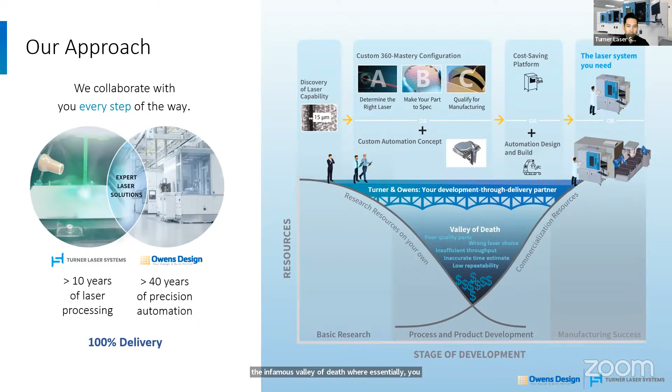This will be a critical step to avoiding the infamous valley of death, where essentially, manufacturing lines power up and you have this equipment running and the laser processes and systems just aren't meeting the specification if you don't consider things carefully. So we have a methodology for doing this at Turner Laser Systems and Owens Design, and this is really based off of a 40-year process that Owens Design has built, where they look holistically at the technology, manufacturing, and business needs of a specific application. And then we break it down into critical phases.

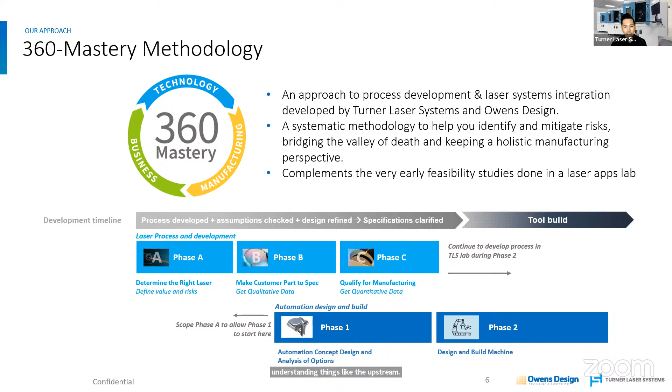And often we'll develop these laser processes. We'll try different optics, different lasers, different setups, fixturing, airflow, they all make a big difference. But a lot of the times we'll develop that in parallel with the automation, and they go really hand in hand. And a critical thing that we've learned in years of working together with Owens Design is not to develop process or laser technology in a bubble, and really to work collaboratively with your automation teams. Understanding things like the upstream and downstream process needs is really critical. And this has led us to great success in deploying these solutions in large volume manufacturing.

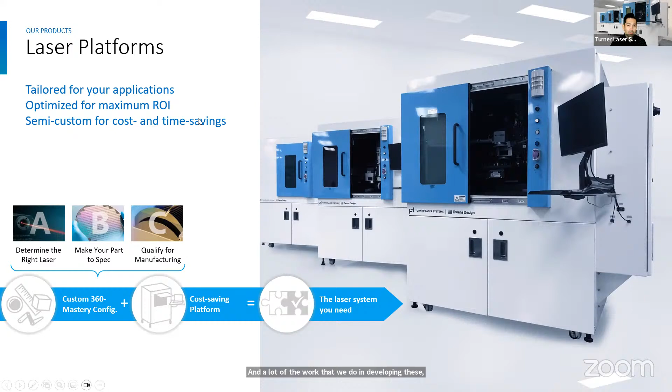Here's an example of one of the machines. I think Dr. Brady was asking about glass cutting. This was actually a machine that we had built that had glass cutting built into it. This was for a medical application, wafer scale. This was also doing via hole drilling and glass-to-glass welding, glass-to-metal welding, and some ablative processes as well.

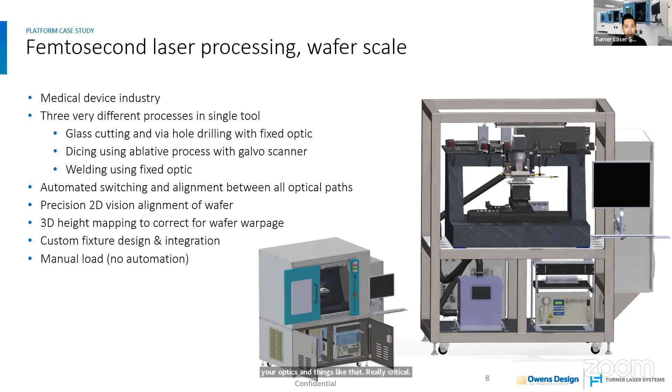Really critical to these types of processes, which we haven't really talked a lot about today, are things like motion control. So motion control, precision motion, things like vision systems, sensors as well, because a lot of times we have to measure the part before we can process it with a laser. We've been talking about things like high numerical aperture optics. It's really critical you have your laser in focus and on the part. So bringing all of these technologies together into an integrated solution is really critical in manufacturing.

Besides the laser and the laser process, often being able to feed materials into the laser machine is critical. And understanding things like, am I able to process the material from one side? Am I allowed to flip the material over? Can I handle the material in certain ways? All of these constraints that we have in manufacturing really affect the process and the laser solution that's going to be applicable. So we provide these automated solutions for feeding materials into these laser machines as well.

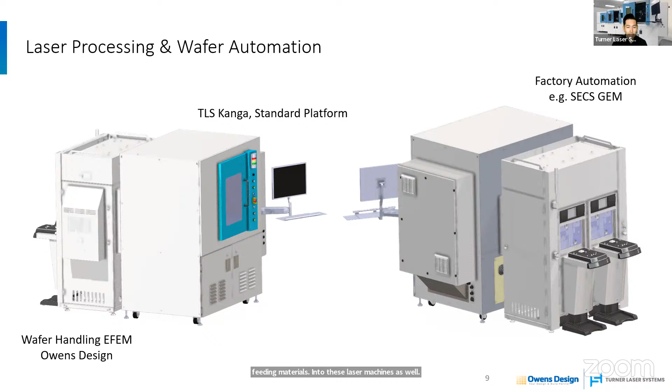And then we can, of course, do things like the factory automation to communicate between our automation systems and the full factory. And besides just standard wafer loaders, we can also do fully custom automated solutions. And this was an example of battery material processing that involved robotics, automated loading, unloading, laser cutting with femtosecond lasers, galvo scanners, coordinated stage motion.

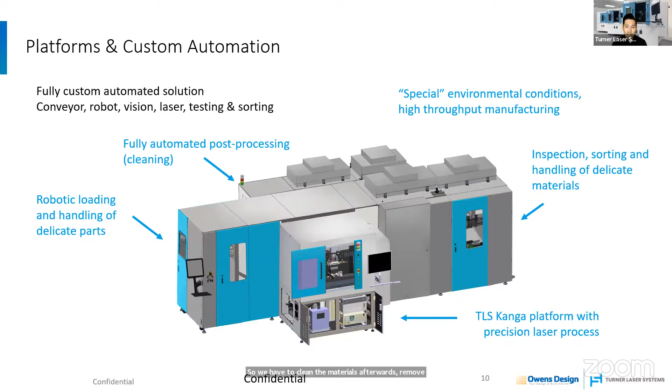And then we had to post-process. So we have to clean the materials afterwards, remove the debris. Most of these ablative-based processes are going to create debris, and there need to be ways to handle, mitigate, and remove it in post-processing. So that's briefly about our company.

And nice to meet everyone here. And in terms of what we can do for you and what you can do for us, we're really looking for partners, whether these are customers and users or suppliers, who align with this philosophy of approaching things systematically, methodically, and working through developing things to create turnkey manufacturing solutions. So, thank you. Thank you very much, Mark.